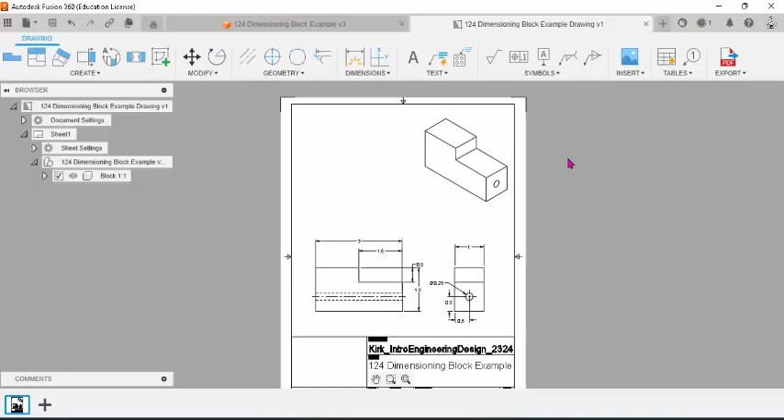Hey everybody, today we're going to show you how to take a part, much like this one, and turn it into a dimensioned multi-view drawing just like so. Alright, let's get started.

Once we have your part fully created with the correct dimensions and everything saved in our part file, we're going to go to Design, Drawing from Design, and change our sheet from a B to an 8.5 by 11, and hit OK.

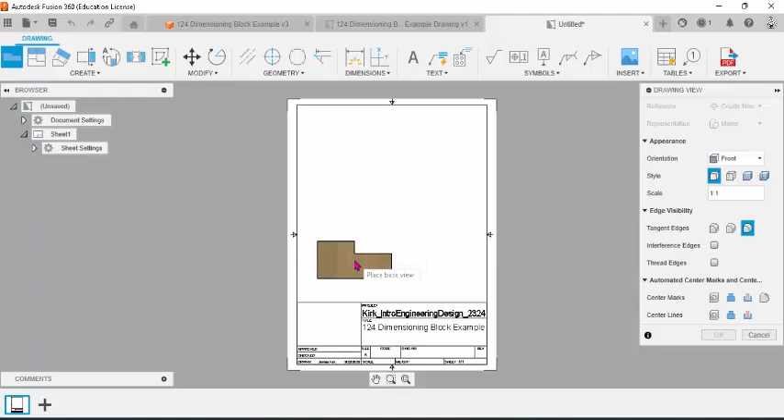Wait for our part to load. When it comes back in, it auto-populates to our home view or front view. We'll place our front view down at the bottom left corner, then put our top view by selecting our project, select the front, bring it up, bring it over to make our isometric, then bring it down to make our right side, and hit the green check.

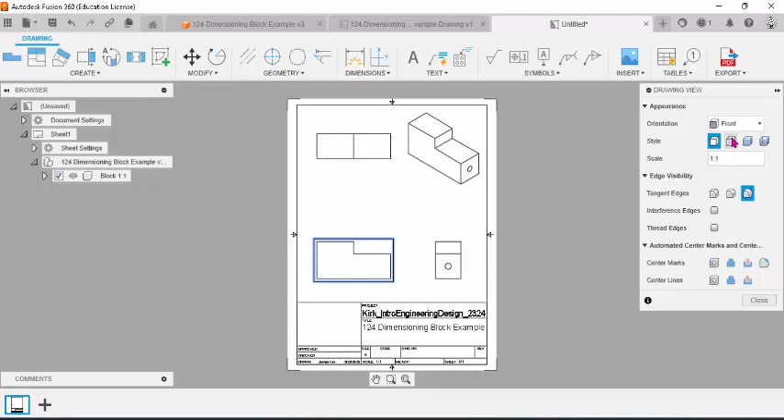After we do that, we'll notice we're missing our hidden lines. So I'm going to right click on my front because I need a hidden line that goes directly between it, or in the middle. I'll hit edit view and select this hidden line option to show up hidden lines. We'll notice it works for our front and our top, and then we have it for our isometric too. However, I don't want it for my isometric.

I want my isometric to only show visible edges. So I'm going to right click, edit view again, change this back to visible edges, and hit close. Alright, so the dimensioning flowchart tells us that we need to create our multi-view drawing, which we just did.

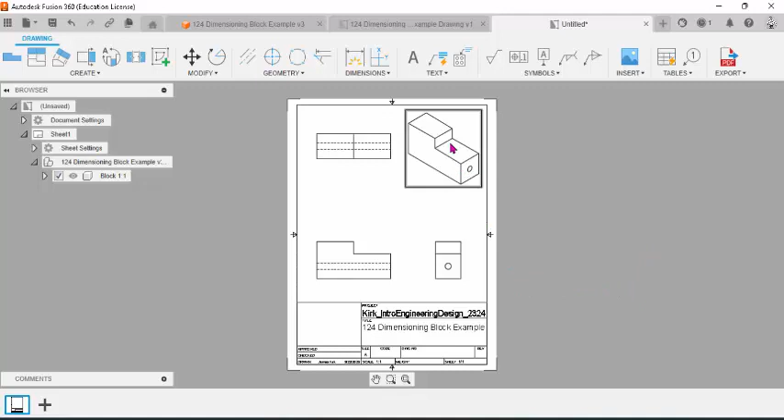The next step is to identify our different features. This one has two features: we have this notch at the top here, as well as this hole on our side face.

After we identify our features and their best faces, we're going to go ahead and dimension them. First, let's dimension the size of our first feature, being this notch that's right here.

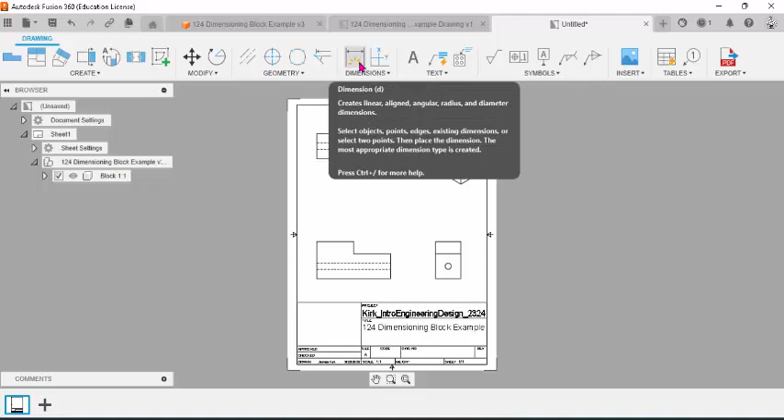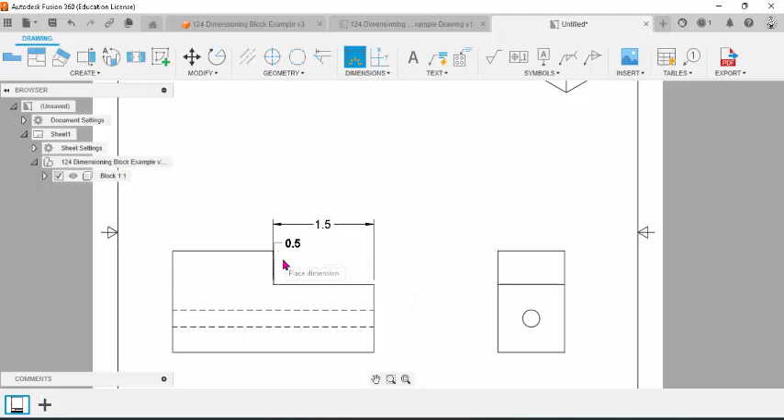I'm going to come up into dimension right here, the hotkey is D. I can scroll in, and I want to point out a couple of ways we can use this. The first method is if I click on the actual line, bring it right up and click again. The other method is if I click on one corner and another corner, then bring that out to there. That also works. You can choose whichever one you feel works best. I like the line tool: just click, bring it out, and be done.

So once I have that notch fully dimensioned, I can hit escape and now we have it done. Okay, next part is going to be doing this hole.

So we have the hole that's over here on the side, as well as the hole depth here and the hole depth for our top. But we're going to notice that we're missing our center mark as well as our center line.

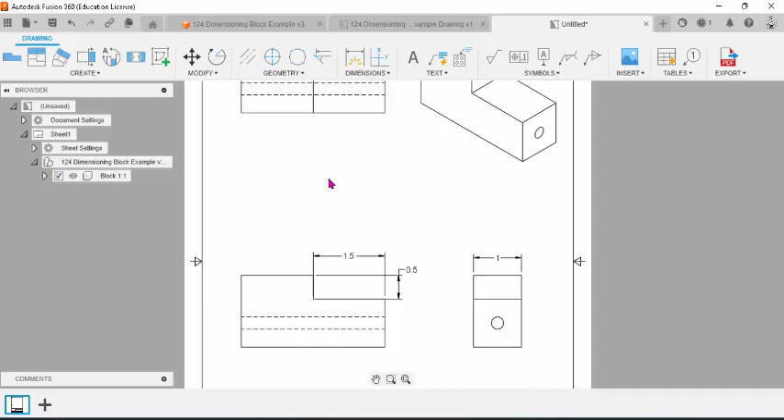So I'm going to do a center line first for our top view and our front. I'll come up here to my center line tool, click on one hidden line, then the other, and it'll automatically add it. Then I'll select one hidden line, then the other, and it will automatically add it there.

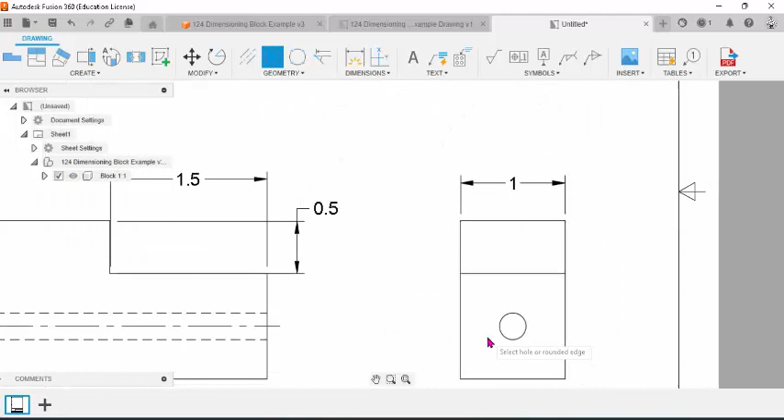To create my center mark, I'll come to my center mark tool right there, zoom in, and select the hole that I want that center mark to go on. Alright, once that's there, let's go ahead.

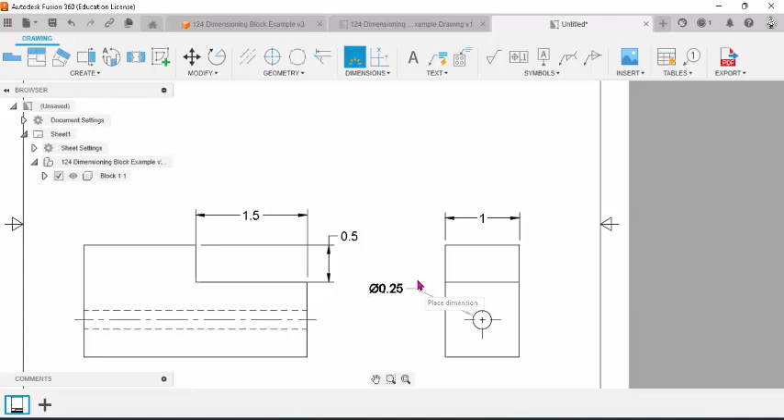Let's dimension the size, I choose the dimension tool and scroll back in. For this case, I'm going to put my leader line up, bring it up to right about there. That looks good. Then I'm going to dimension the location of this hole by selecting one corner to my center mark going out, so we can bring that right there.

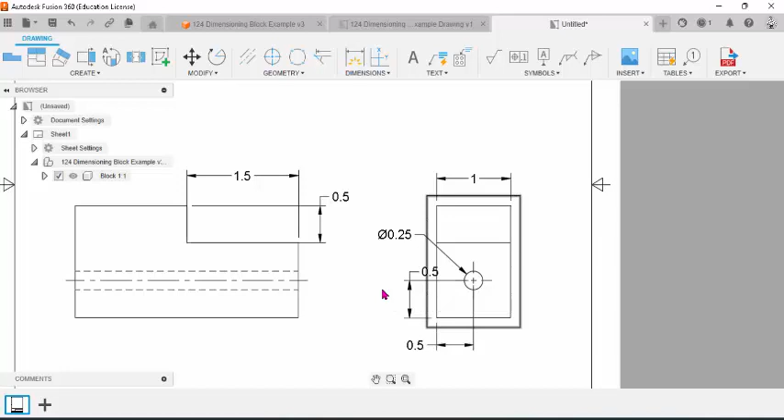As well as this center mark here to this hole as well, and I want this one to come down to there. I can hit escape, pull out. We're going to notice that I don't want this 1/2, so I can actually move that 1/2 if I like, if I click it there and move it to the middle.

So we have our size, we have our center mark, we have our location. The only thing we're missing is we need the depth of the hole.

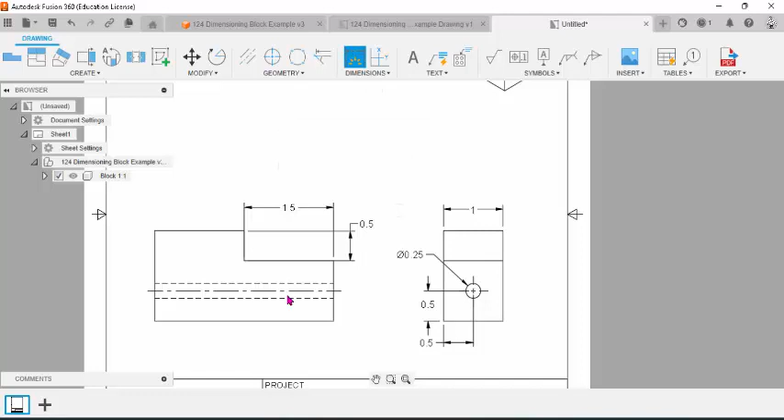So we're going to select dimension, go from one edge of my hole to the other. Notice it's 3 inches. Zoom out, bring it over, and we can click again.

Now that we have all of our features dimensioned for size and location, we can go ahead and dimension the overall part. Notice we have the overall width dimensioned, I have the overall depth dimensioned. Now I just need to dimension the overall height.

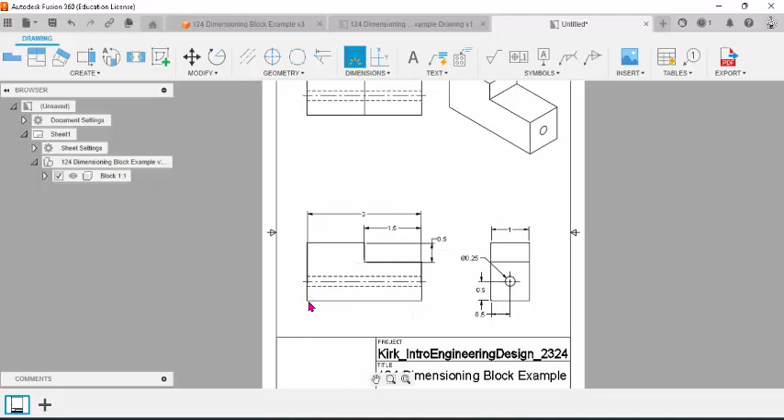Again, I can select one corner, another corner, bring that out, click there. Alright, so now we have the overall dimensions there. We're going to notice that we did not use our top view, so I can click on our top view, right click, select delete. Save our multi-view drawing, and now we are done.